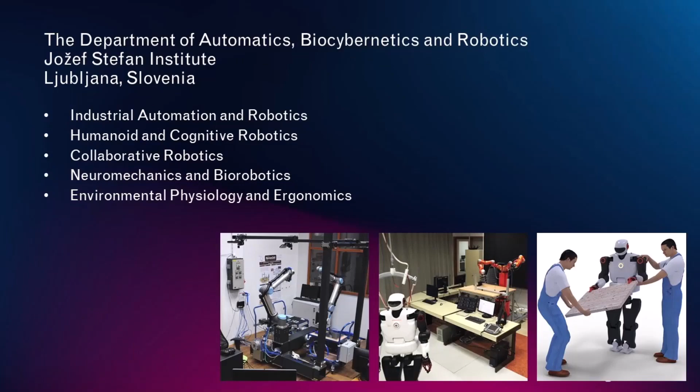Most related area of research at our department is industrial automation. In this area, we conduct basic and applied research in the area of factories of the future and industrial automation.

One of our goals is to expand the field of industrial automation through passive and active reconfiguration, modular design of software and hardware architecture, implementation of easy-to-use robot programming, and implementation of digital twins.

In the area of humanoid and cognitive robotics, we focus on the development of new technologies for robotic systems that can operate in natural environments and in collaboration with people, with a focus on industrial settings.

This is only possible with robots that can continuously and autonomously acquire new sensory-motor behavior and higher level knowledge. Humanoid robots are, due to their similarity to humans, especially suitable for operations in environments shared with people.

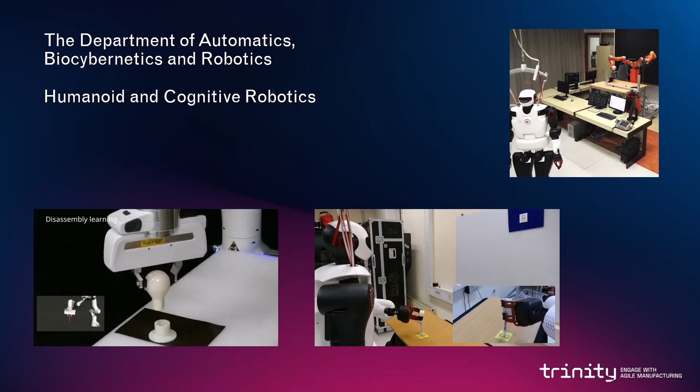The humanoid robot Talos was designed with an industrial setting in mind. The aspect of collaboration, an integral part of factories of the future, is further studied in the area of collaborative robotics.

Here we use an integrative approach of robotics and machine learning to investigate and study collaborative robot behaviors in physical human-robot interaction scenarios. The study of human-robot collaboration is enhanced by the study of human-human and robot-robot collaboration.

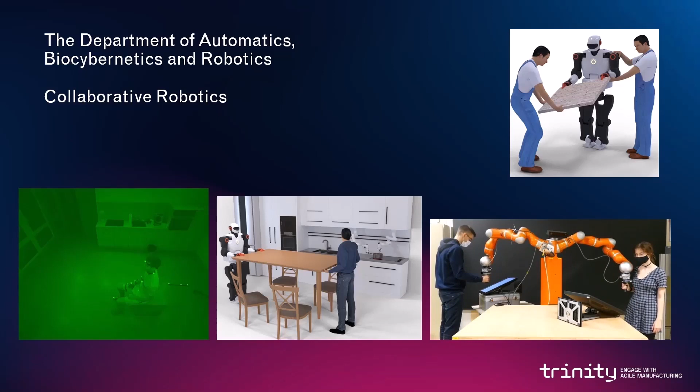In this section, we will focus on a general overview of the Digital Innovation Hub at our institute.

Jožef Stefan Institute is the Digital Innovation Hub coordinated by the Inner Center for Technology Transfer and Innovation. Based on European integration within the European Commission's Digital Innovation Network, the Hub is participating in applications for European Commission's

projects for digital innovation hubs, in applications for projects where the component of the Digital Innovation Hub is required, and in applications of the letter of intent on various initiatives for digital innovation hubs.

As the central part of development, digitalization, and industrial relations at national and international level, the Hub is establishing a system of collaboration between the JSI research departments, the domestic and foreign economy, and the partner networks within the Enterprise Europe network and the network of technology transfer offices.

The Hub helps researchers and companies to innovate, to transfer scientific results into practice, and digitalization of industry within the framework of a network of competence centers across the European Union.

The Hub provides one-stop shops and cross-border technology transfer services in the EU and serves as a contact point for the local ecosystem in Slovenia.

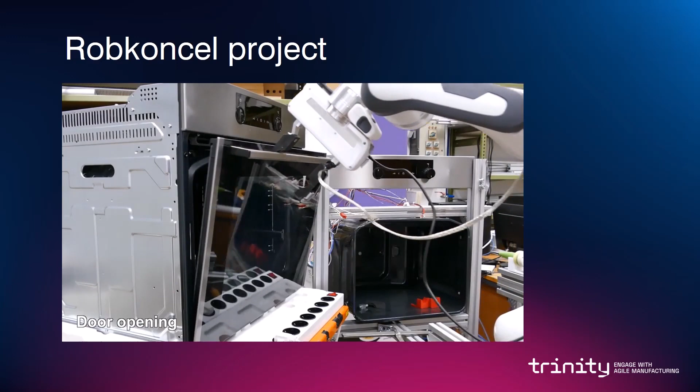In the Robkoncel project, we collaborated on development of a robot-aided quality inspection of household machines using a collaborative robot. Quality inspection of final products is becoming an increasingly important factor in improving competitiveness in household appliance manufacturing.

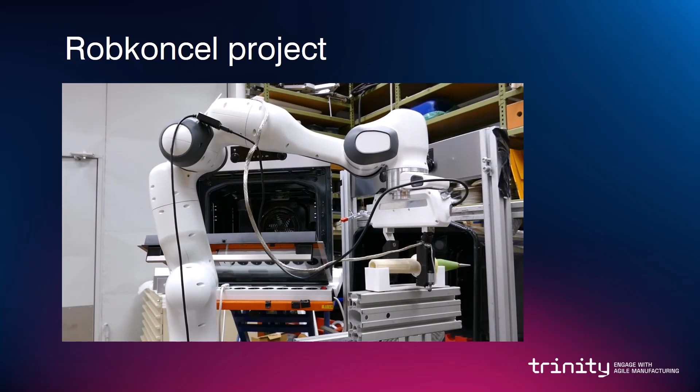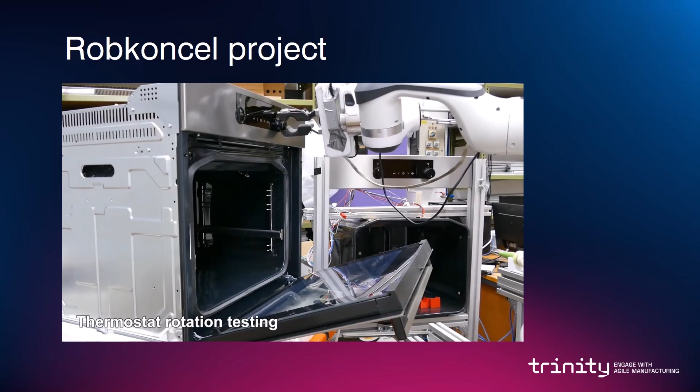A robotic cell concept for quality inspection of household appliances, which is used as an end-of-line inspection system, was designed. We mainly focused on those inspection processes where the interaction of the robot with the products is crucial.

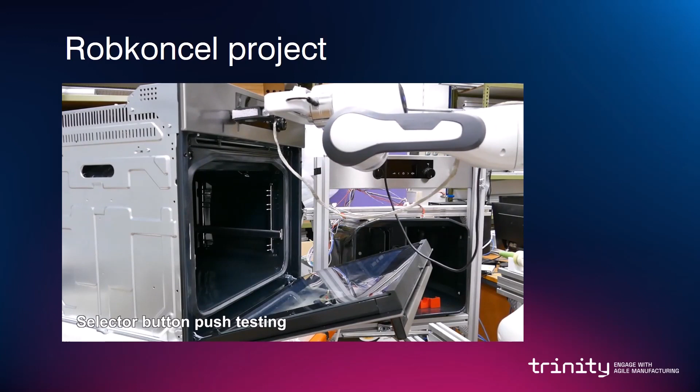In the case of household appliances, this is primarily the inspection of buttons and knobs. We proposed inspection procedures that use the robot's internal torque sensors. A parametric approximation of the measured torque based on radial basis functions was used to identify the faulty products.

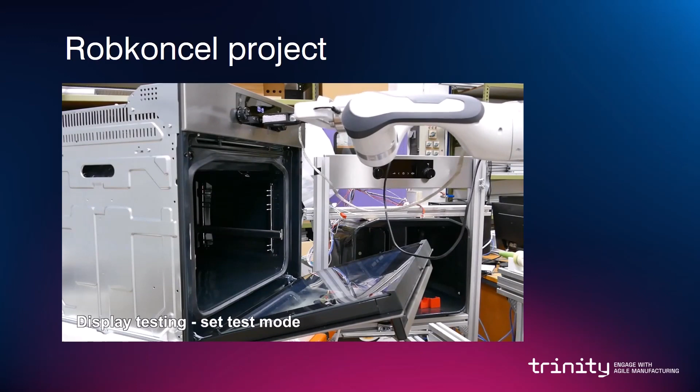The criteria for defect detection are based on changes in forces and torques. Experiments on real devices have shown the success of the proposed method. Using a Franka Emika Panda collaborative robot, we can successfully replace a human operator for quality inspection.

The robot is used to manipulate sensors such as camera and for the manipulative task required for the product's functional testing.

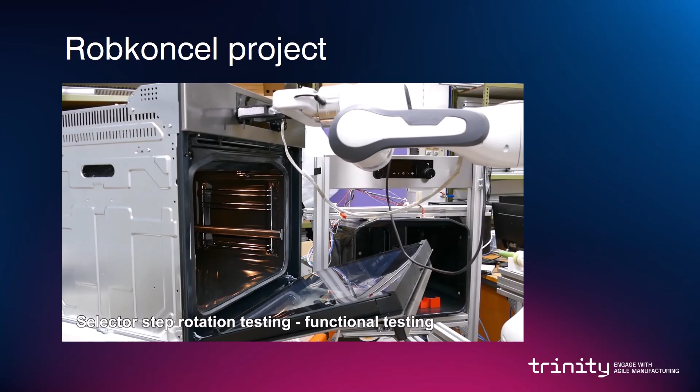Besides, some inspection procedures are performed directly by the robot. In doing so, we take advantage of the flexibility and versatility provided by the collaborative robots.

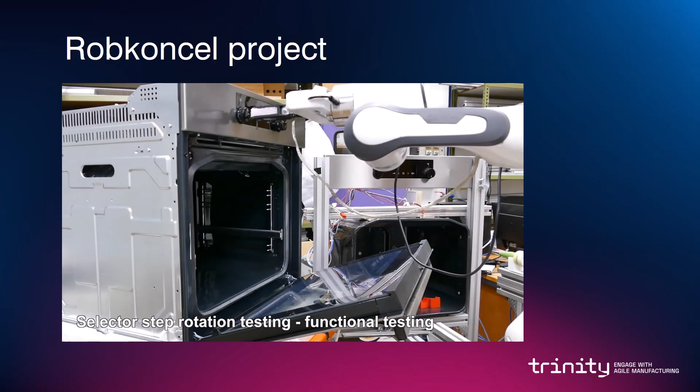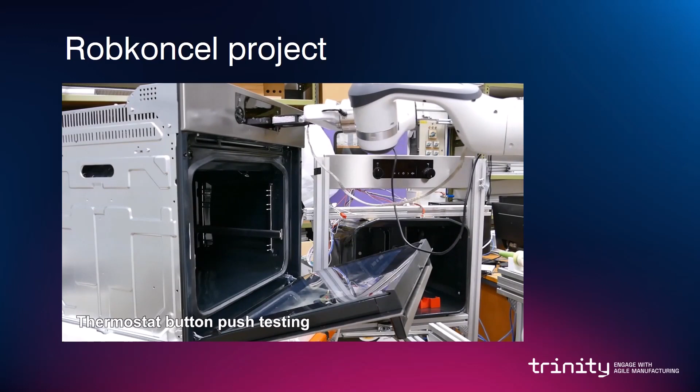In the quality inspection of household appliances, especially for the inspection of buttons, we use internal joint torque sensors of the robot. As mentioned, experiments on real appliances have verified the efficiency of the proposed methods and classification of potential defective elements.

In collaboration with an industrial partner, a prototyping project to improve a gearbox design was carried out. The goal was to design and test a gearbox with the possibility of torque measurements of the part itself.

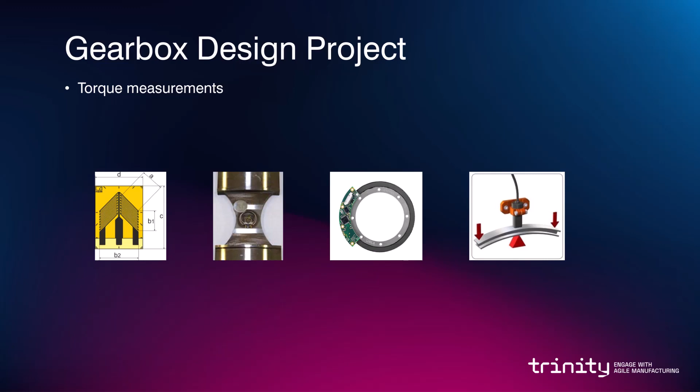After initial research into existing solutions and patents, four possible methods for torque measurement were identified: measure strips, surface acoustic waves, rotational encoders, and magnetostriction. Based on several factors, the prevailing one being cost, measure strips were selected.

To determine optimal positioning for the selected torque sensors and to optimize this design, the deformation of the transmission housing was analyzed in simulation. We analyzed the part under shear, torsional, transverse, and bending stress.

Even though some areas of the housing were identified as possible sensor locations, we determined the signals would be too weak to get an actual measurement.

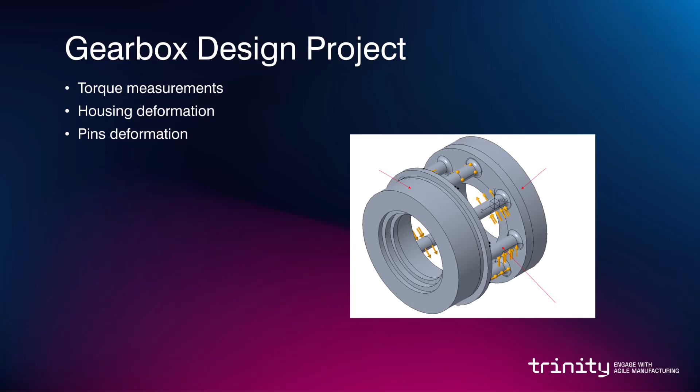So in the next step, we looked at the pin deformations. We looked at the deformations of these pins in the transmission cage. The analysis provided the optimal number of pins for measuring purposes and locations for measuring strips.

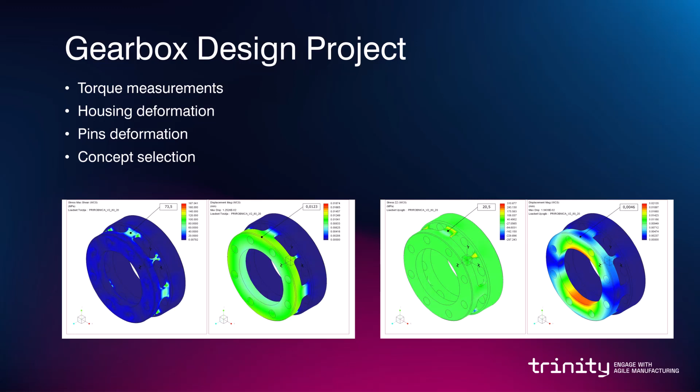Based on these results, we defined four possible design concepts and compared them via evaluation. The best suited one was selected for physical prototyping.

In the next step, the prototype was constructed. An evaluation environment was also defined and built. Multiple sensors were employed on the prototype itself and in the evaluation environment.

Multiple measurements were carried out, from shear, torsional, transverse, and bending stress to temperature dependencies. These measurements from real life were compared to previous ones gained from simulation.

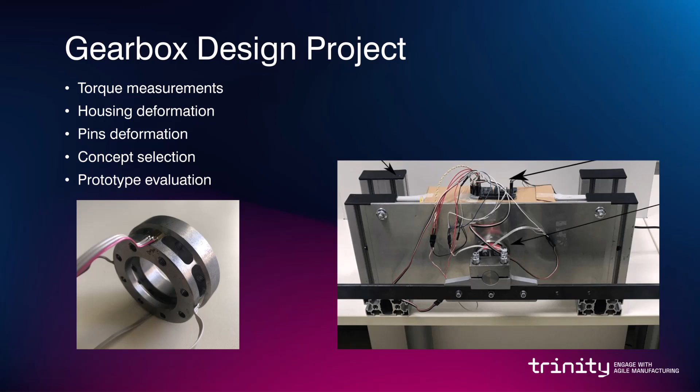The complete results showed the validity of our proposed design. In the end, electronic components were designed and produced.

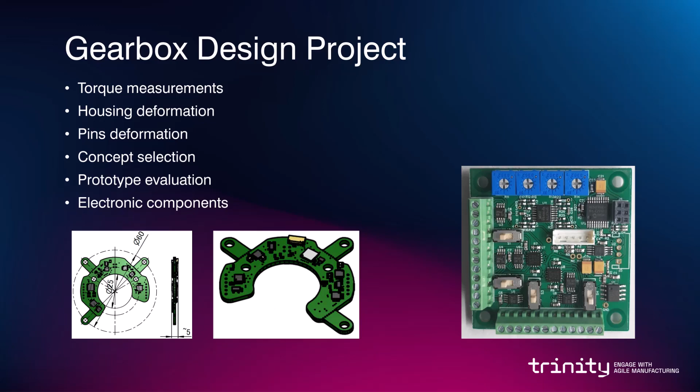Let's look at the last example activity regarding Agile Manufacturing. We collaborated with a robot company to develop a skill library for transfer of complex tasks.

The project was motivated by the need for automation of finishing operations, such as polishing and grinding, on contemporary industrial robots. Existing approaches are both too complex and too time-consuming to be applied in flexible, small-scale production, which often requires the frequent deployment of new applications.

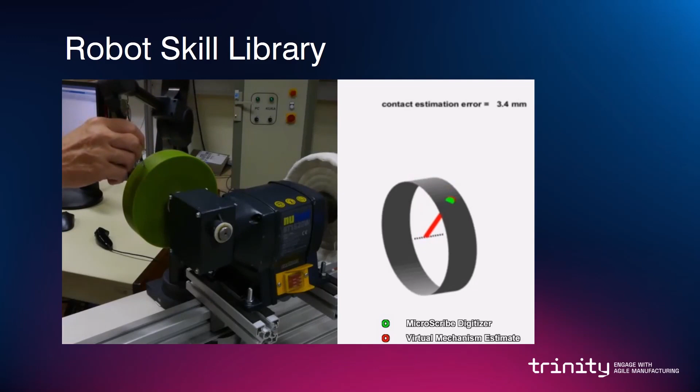Our approach is based on programming by demonstration and enables the programming of finishing operations also for users who are not specialists in robot programming.

Several different approaches were used to capture human demonstrations: digitizers, manual robot guidance, and marker-based vision systems.

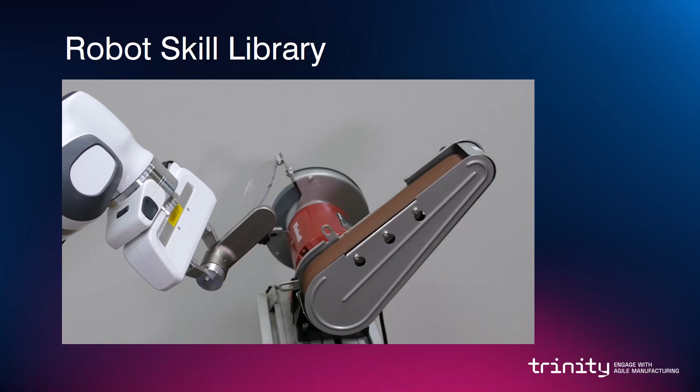Programming by demonstration is especially useful for teaching finishing operations because it enables the transfer of expert knowledge about finishing skills to robots without providing lengthy task descriptions or manual coding.

Besides the human demonstration of the desired operation, the proposed approach also requires the availability of a kinematic model for the machine tool applied to carry out the finishing operations.

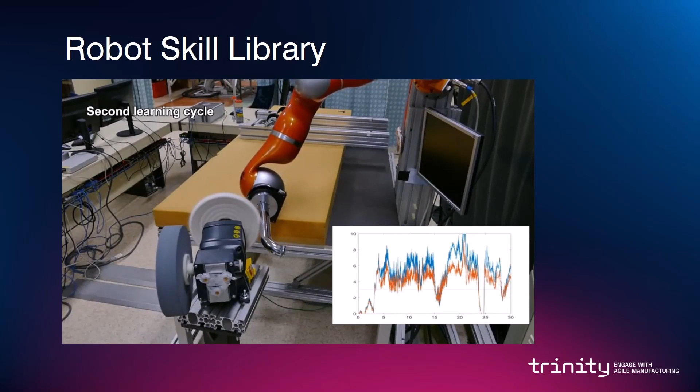The transferred skill can be further improved through force-based learning and virtual mechanisms. Several practical examples of grinding and polishing tools were integrated during the project.

Another feature of the proposed system is that user demonstrations of finishing operations can be transferred between different combinations of robots and machine tools.

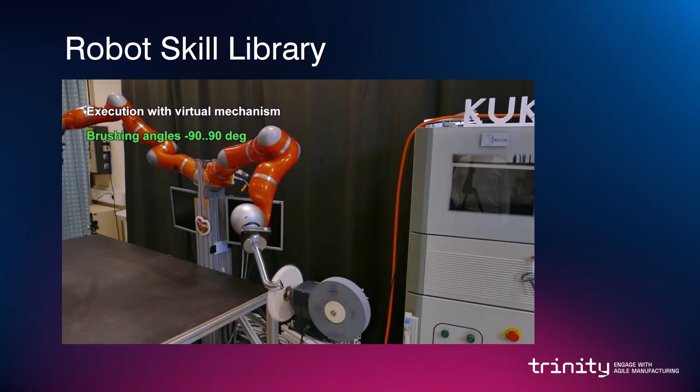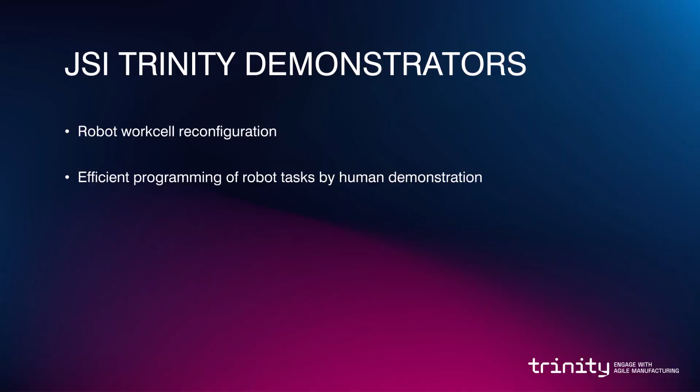At the end, let us briefly present the demonstrators we're developing under the Trinity project at our department. The ability to reconfigure production cells is crucial for agile production processes where production frequently changes from one product to another.

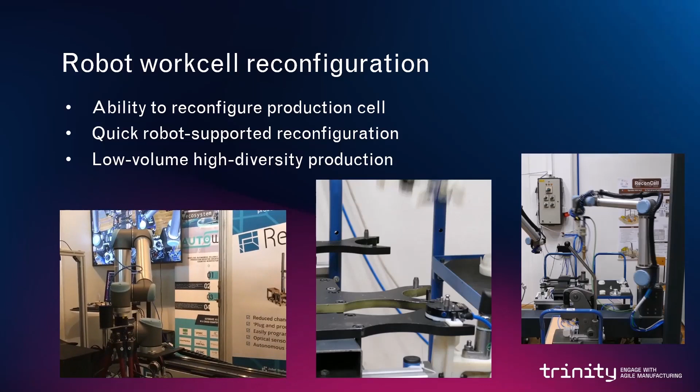In this demonstrator, we develop a robotic work cell that includes hardware components with passive degrees of freedom to enable quick robot-supported reconfiguration from one product to another without any manual intervention.

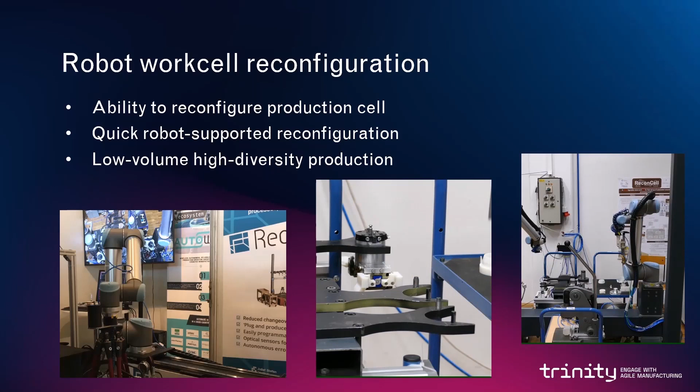The developed robot work cell is a reconfigurable manufacturing system suitable not only for large production lines, but also for low-volume, high-diversity production.

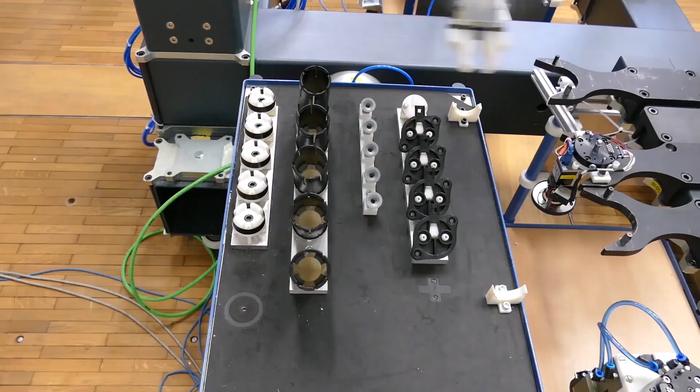The developed system enables quick setup and short reconfiguration time with minimum intervention by human workers. It offers software and hardware reconfiguration tools that can be used also by users without in-depth expert knowledge.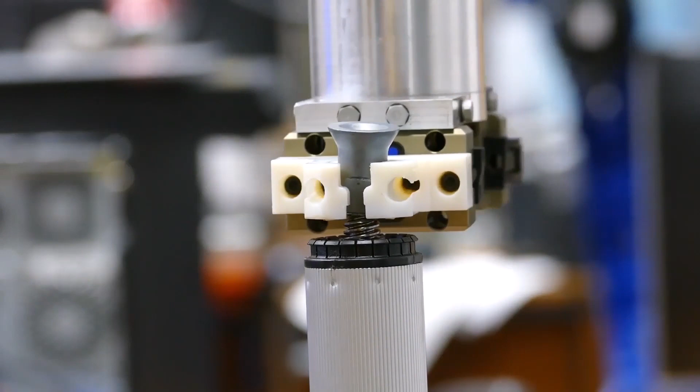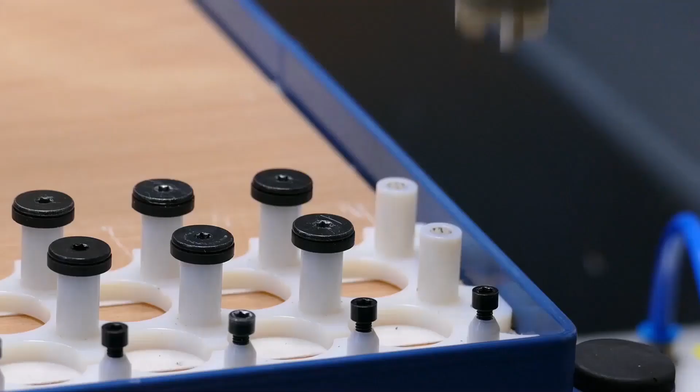However, if the production task requires new capabilities or modules, users with more in-depth knowledge can develop new software and hardware components without disrupting the already defined work cell architecture. This is due to the modularity and tight integration of both software and hardware elements of the work cell.

The developed work cell can be used in any sector that requires automated assembly of a variety of products that change frequently. Some example areas where the proposed reconfigurable cell was implemented and evaluated cover automotive industry, furniture industry, electronic industry, etc. In the automotive industry, for example, the cell was used to implement the assembly of various automotive light housings.

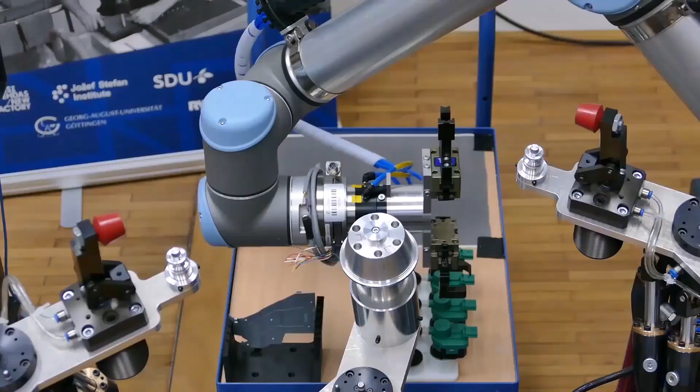The original standard production line consists of specially designed assembly machines, different for each light housing model. While these machines provide an assembly method with short cycle times, they are not cost efficient as they have to be designed and produced for each different light housing model.

To ensure the possibility of assembly of various light housings from a family of products in a single work cell, the developed work cell focuses on reconfiguration of housing fixtures within the cell.

The presented use case, titled Efficient Programming of Robot Tasks by Human Demonstration, aims to release the burden of traditional robot programming. It addresses the challenges of robot programming by providing software and hardware frameworks to integrate the programming by demonstration paradigm into an effective system for programming industrial production tasks.

For example, automated robot assembly, finishing operations, bimanual tasks, robot motion for vision control, etc.

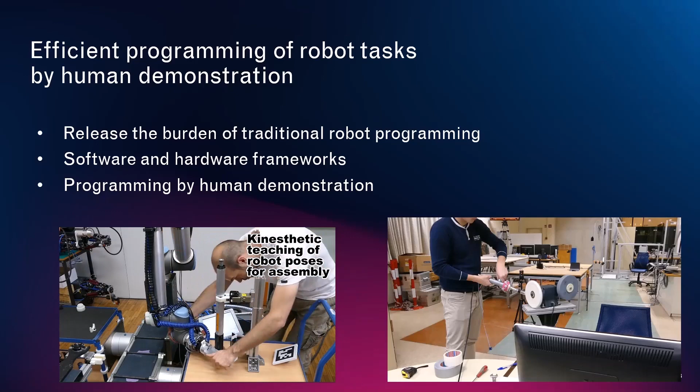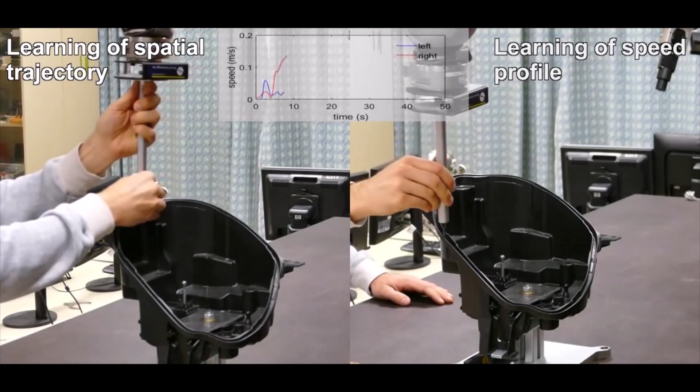In this demonstrator, we provide effective user interfaces for programming by demonstration in industrial environments for a variety of systems. They can be used for the specification of robot operation in industrial production tasks.

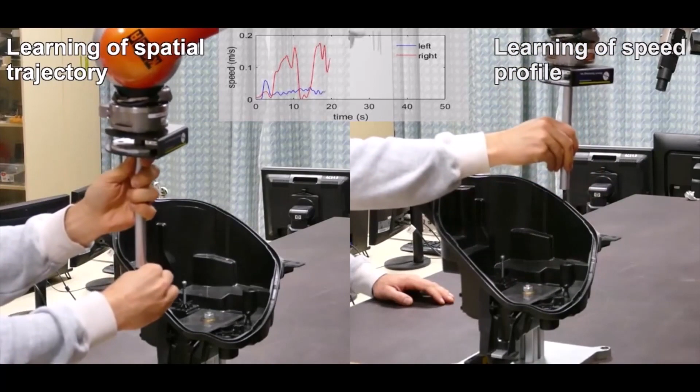The demonstrator shows that robot programming by demonstration is a viable paradigm to improve the programming of classic industrial production tasks, such as autonomous robot assembly, as well as tasks that are rarely automated in industrial production, for example finishing operations and bimanual tasks that include force control.

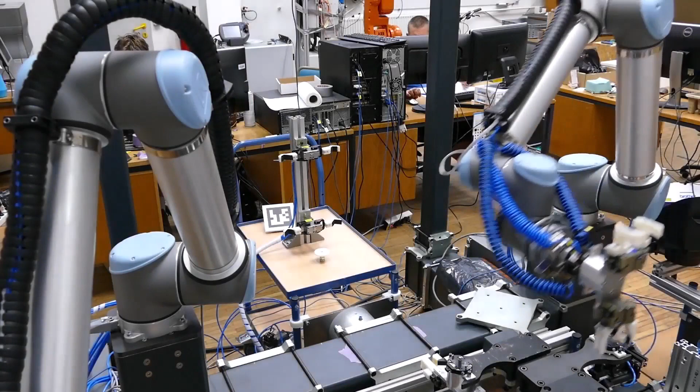The proposed approach can be used in any sector where new robot tasks change often, or there is a need to speed up or ease the robot programming process.

Some example areas where this approach was implemented and provided benefit were the furniture industry, automotive industry, shoe industry, etc.